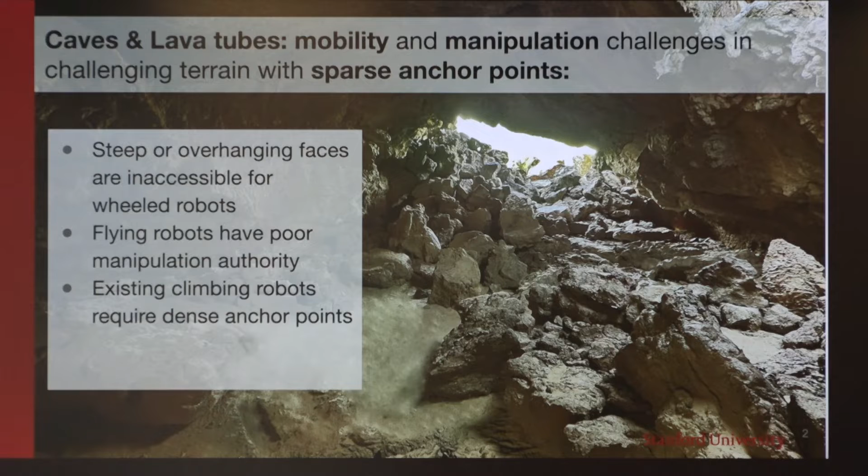The canonical solution - and it's interesting, I had dinner last night with Aaron Parness, who was one of the developers of the Lemur robots from JPL. Again, they're very impressive. They use microspines to cling on to surfaces.

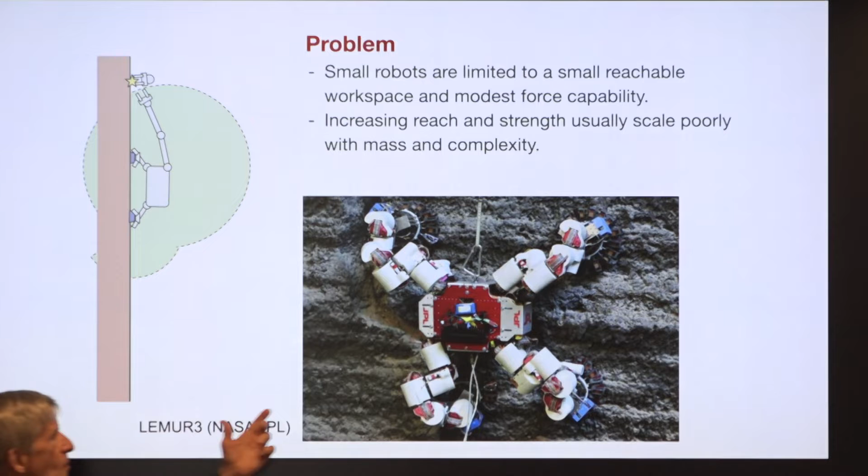This is a complicated robot, but it's also not very big, and therefore it can't move very far with one step. It does a tripedal crawl, keeping 3 legs on the surface at all times for safety, and then moves 1 leg at a time.

The workspace, the reach space of possible grasping sites, is just not that large. So it moves very slowly.

Large obstacles are big things to clamber over or try to get around. And it's always a little bit precarious.

So the thought was, what if you could have something that has sort of the compact form factor of a lemur, but can reach a really long way? And that was the idea behind ReachBot.

I have a little GIF here, which was prepared by Stephanie Newdick for her PhD defense, and I love it because it in a moment kind of captures the idea behind ReachBot.

So they were doing some science, drilling into the strata.

I think it concludes with taking a selfie. Yeah, but no, important optical sensing of the lava tube floor, right?

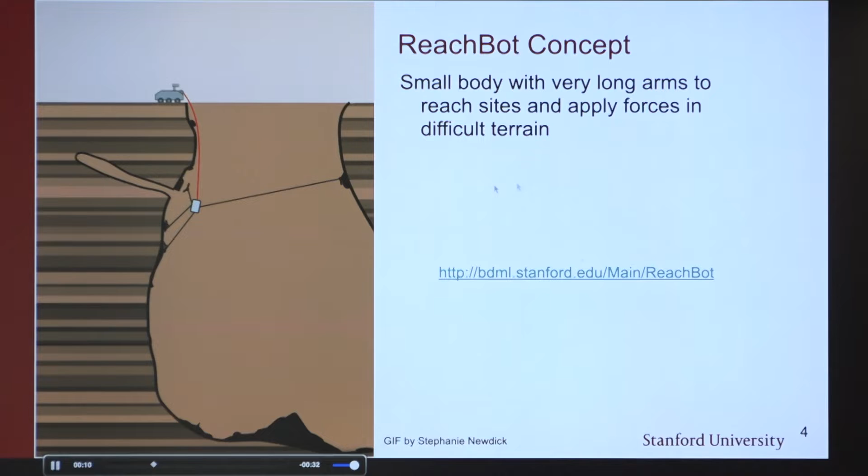The idea of having a small body with really long limbs, okay, here comes the retroactive bioinspiration part. Small body with really long limbs, I mean, it's a good idea. It's been around for millions of years.

These are harvestmen. They're not spiders, they're arachnids, but they have a small body, very long limbs, and this gives them the ability to navigate in very complex three-dimensional terrain.

But you may also have recognized that there's potentially a scaling problem here. The largest harvestmen are maybe about that big. You don't see any the size of a dog, or where the body would be the size of

a suitcase, and the limbs could be 20 or 30 feet long. And it's probably for us just as well, unless you like the spiders in Lord of the Rings, the cave spiders.

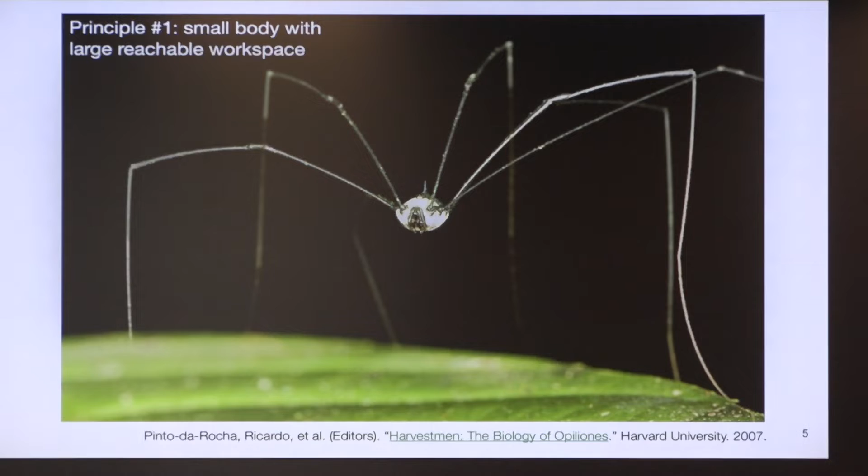So yeah, the problem, of course, is that mass goes as length cubed, beam strength goes as length squared. We're prone to buckling, and in fact, what you see these spider harvestmen do is in very windy, stormy weather,

they'll stretch out sprawled and load their legs mostly in tension because they're stronger that way. And that's a good trick.

Still, scaling's an issue. However, you might ask yourself, how big could this form factor get? Like if gravity was really not so much of a problem, and if I could start using stronger materials.

Are there any spider-like morphologies that go to several meters, maybe 10 meters in diameter? Yeah, if gravity's not a problem, the morphology can be successful. So there we go.

All right, so that's part of the idea behind ReachBot. The other part is an enabling technology. These are space booms. They're used for antennae in space or other space structures. They're carbon fiber, they're deployable, and they're quite strong.

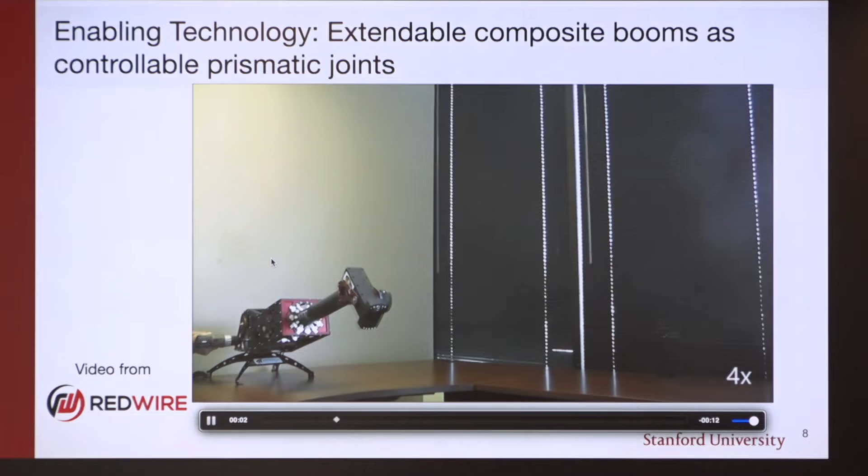And if you think about it, it's a nice solution, because what if you, unlike the harvestman spider with jointed legs, what if you said, well, what's the simplest possible structure I could have that would give me a really long leg? Well, you know, there's some appeal.

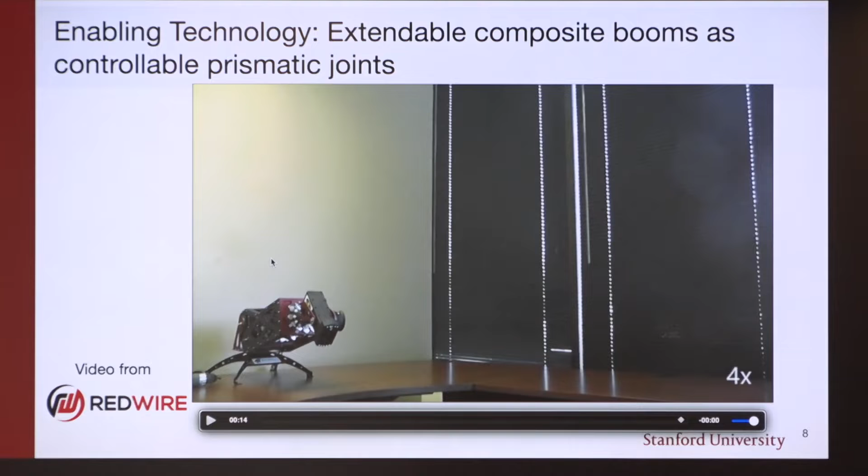Except for buckling, right? So if I make it out of a stronger material, I may be able to go pretty far, but I'll still have something which is probably stronger in tension than it is in compression or bending, but that's okay.

The second principle, the first principle is this idea of a small body with really long limbs, and in this case, we're using these deployable, unrolling space boom type structures.

The second is that we want, at the terminal ends, we want something that can grip and grip strongly. So here we're going back to the same kind of idea as in lemur, where we've got grippers with microspines, and we can pull with tens or even 100 newtons. And this is not entirely a new idea either.

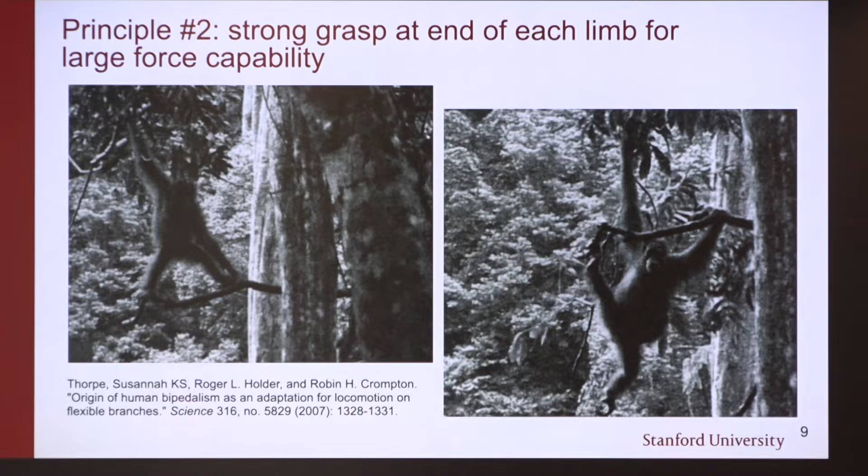If you can have several limbs and you don't distinguish too much what's an arm or a leg, and you have strong grasps at each terminal end, what's interesting is that in a difficult three-dimensional environment, this means that locomotion

becomes manipulation, where you manipulate yourself. And that's interesting, because that means that there's a whole big body of grasp theory which can be adapted to our purposes.

I've been working on hands and grasping for 30 years, I guess. The basic idea is you have several coordinated fingers pressing upon a body. You want to express what happens in terms of what the grasped object should do.

The fingers have constraints due to friction, and the fingers can push but they can't pull. We have the opposite problem: to a first approximation, we have very long beams that can pull but not push. Well, they can push a little bit, especially if they're not too long, but to a first approximation, instead of fingers that push, we have beams that pull. And the one part that's a little different is the details of the contact.

Instead of talking about friction cones and whether the finger can push without slipping, where the force vector has to be inside the friction cone, we now talk about having a spiny gripper. The gripper has some sort of limit surface of applicable forces and moments, and we try to make sure all the grasp forces stay inside all their limit surfaces. That's what I'll be talking about in the next few slides.

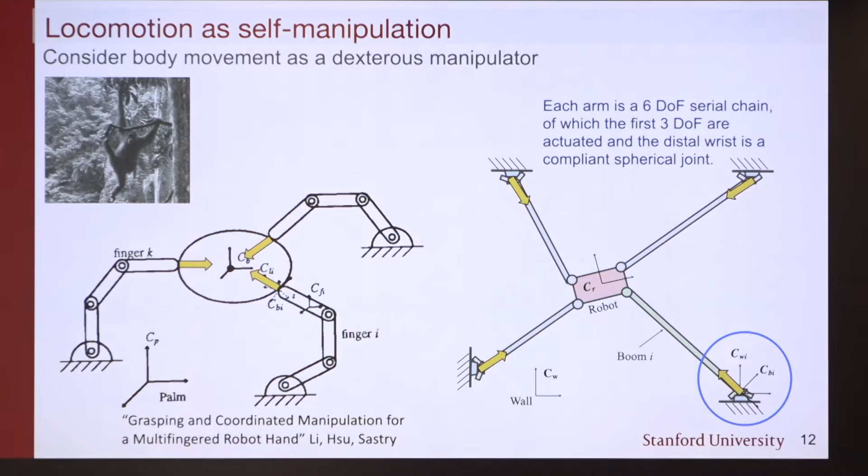Kinematically, each arm is a 6-axis chain. We have a 2-axis pan-tilt shoulder, a very long prismatic axis for the arm, and then a passive wrist. We're also looking at whether you could have an active wrist. Maybe, but we're really trying to minimize weight at the end of these booms, because when you have something going way out, like the tape measure, you really want what's out at the tip to be as light as possible so you can steer it to a likely grasp point.

And of course, our first prototypes were in fact these, mounted on a platform.

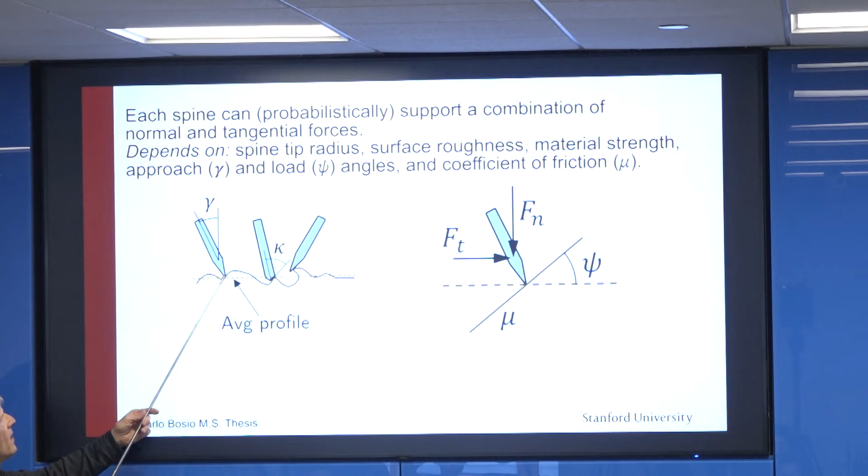So spines—we've done a lot of work over the years on spines. Many of our students at JPL and elsewhere have been looking at spines. The gist is that at the microscale, it's still friction. You've got a rough surface and a spine interacting with it, and depending upon the details of the contour right at that point, that determines in which directions I can exert force without it slipping or popping off.

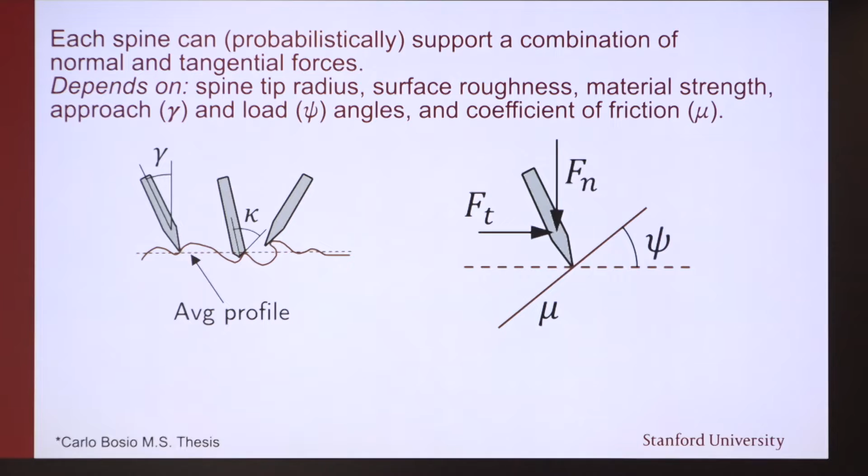For a collection of spines, I can talk about the probability that some aggregate set of spines will collectively be able to exert a certain force without slipping or popping off. So in the end, what we get is a probabilistic estimate for how much force an array of spines should be able to exert, depending on the roughness and the geometry of the surface.

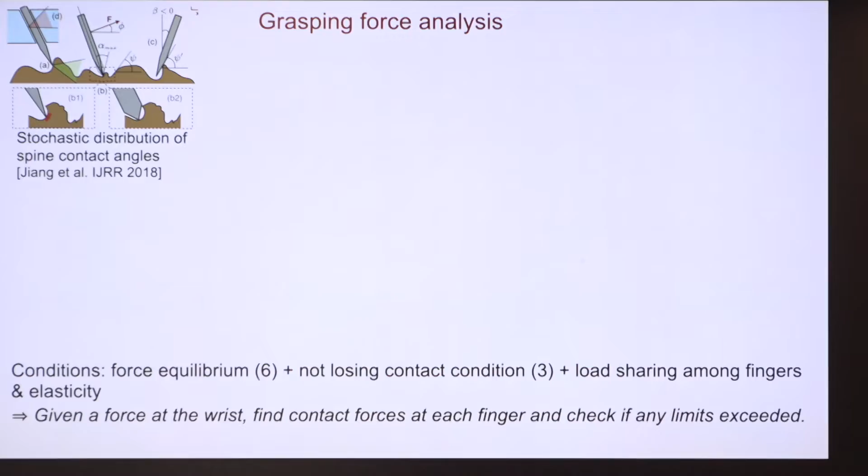And that is the beginning of our grasp force analysis. Here I'm talking about grasping at the level of one gripper at the end of one of these very long arms. So we have a stochastic distribution of spine contact angles, which depends on how rough the rock is and how sharp the spines are.

We like to use two things that work really well. One is suture needles. The other is Japanese microfishing hooks. I think it's wonderful that Japan, the country that developed bonsai, also has a hobby of microfishing. The fish hooks are really good, and we buy a lot of them and put them in our grippers.

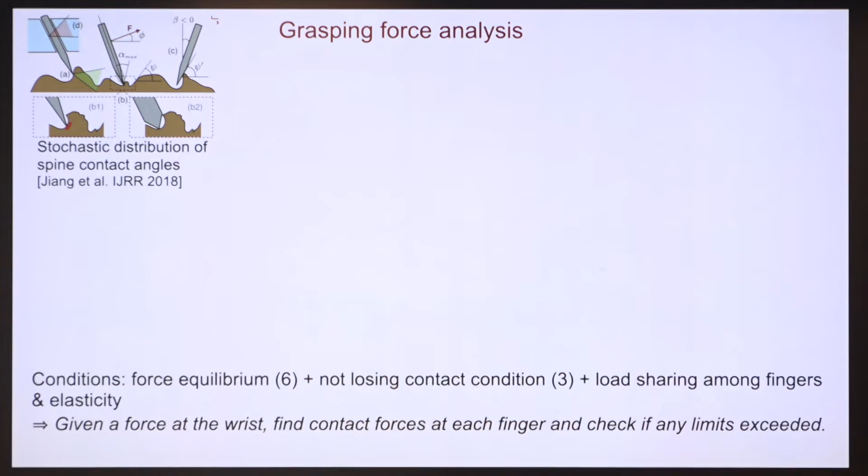So you do grasp analysis. We want to maintain force equilibrium. We also have some geometric constraints—we don't want any fingers to pop off the surface when we apply loads. And we want load sharing, meaning that when I apply a force to the whole gripper, that force should be shared among all three of the fingers.

What that means is I can do a grasp analysis and say, for a given force and moment, should this grasp be able to satisfy it? The answer is stochastic—there will be an expectation and a fairly big variation, because spine-surface contact is inherently probabilistic. I can tell you the estimated force, but it's just like the probability of rain tomorrow—there's variation associated with it, and that's something to keep in mind as I continue.

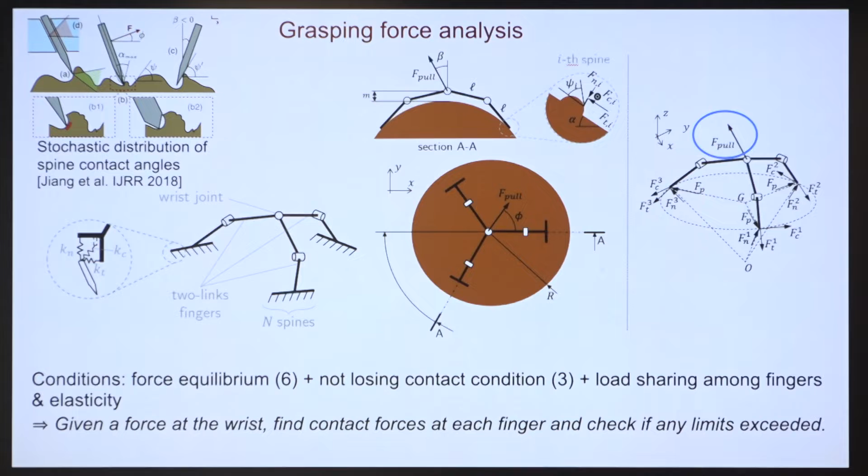So we get our estimated pull force.

And we then do a Monte Carlo simulation to build up a limit surface. So given a set of possible pull forces, and given what we know about the geometry of the surface we're grasping, and given what we know about how rough it is and how many spines we have, we can do this predicted limit surface.

And the results look like this. I thought I would point out one thing which is kind of interesting. Here we have a spine, an area where a spine is interacting with a bump on the surface. What's interesting is that if you have a gripper holding on a surface, this plot shows the ratio of pull force on the gripper to internal grasp force.

So if I'm grasping this bottle with a certain internal force, and you ask me, how hard can you pull it? Here, go ahead, we'll try it. You pull it out of my grasp. That's exactly the ratio we're plotting here, okay? So it's pull to internal force, as a function of grasping harder.

You can see that it really depends a lot on these angles, which again depend partly on how much I'm wrapping around like a surface on the rock and how rough it is. So what this tells you is that unlike our previous work where we had robots climbing more or less flat cement or cinder block walls, there's a big advantage if we scan the surface and say, aha, there is a little knob-like protrusion.

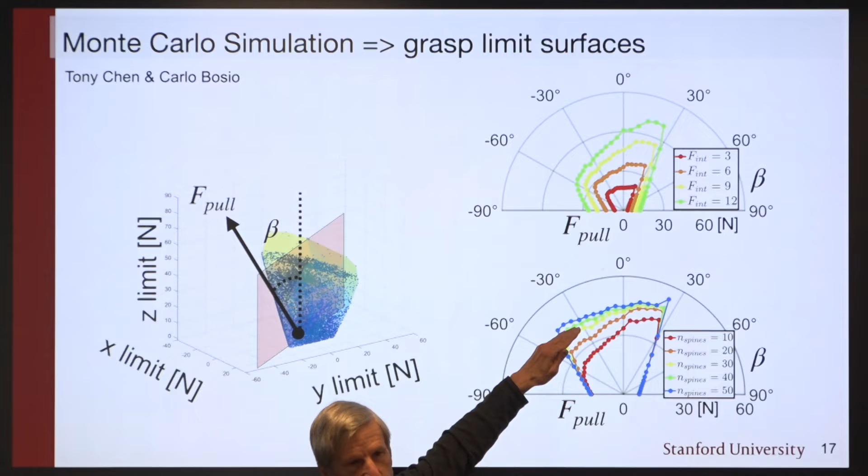All right, so here's Tony's gripper. He worked endlessly on this. It's an amazing piece of under-actuation.

Remember, we're trying to really minimize weight at the end of these long booms. So it's all one rather small motor, heavily geared down. There are tendons for actuating, and then there's a tendon for release.

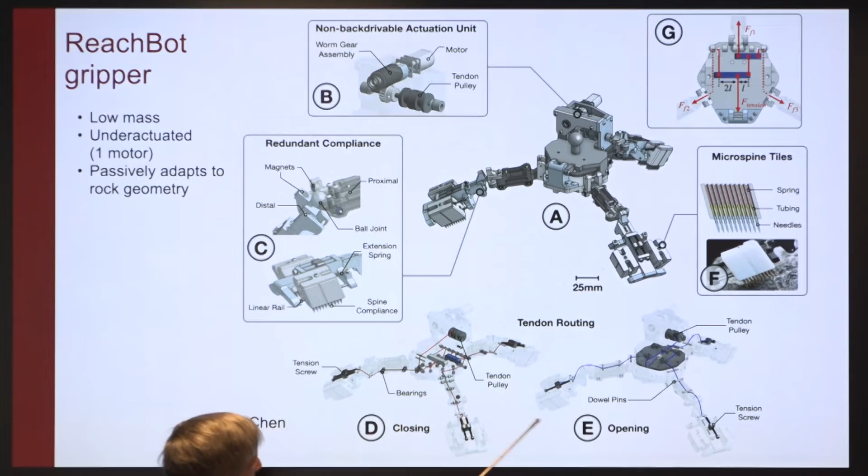Many degrees of freedom. We actually did a study - how many degrees of freedom do we really need along each finger, and where do they need to be - and found a combination that seemed to work best over these kind of protruding surfaces.

How many phalanges do we really need? Where do the joints really need to be? I wouldn't say it was a formal optimization, but this combination really did seem to work best. And if we take out 1 degree of freedom, it works noticeably less well in terms of how well it conforms to the surface.

And here we're using what are called spine tile arrays. This was actually the development of Hao Jiang, now at Flexiv. We found that this dense packing of spines, where each one of them is on a spring-loaded linear little - they're in a sleeve, in a hole - so they're actually very soft.

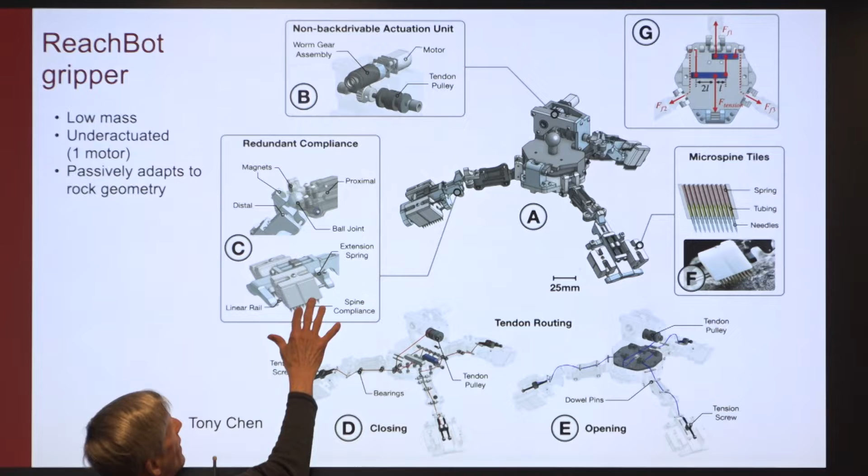I should have brought one in - if you touch it with your finger, it's so soft that it doesn't hurt. It's not perfect load sharing, but it kind of more than makes up for it in spine density. So there's our spine array, and there's our gripper, and it actually matched quite well with the limit surfaces that we had. So that's about as much as I wanted to say about gripping.

Let's talk a little more about some of the other parts of ReachBot. Another very important part is motion planning. This is mainly the work of Marco Pavone's students.

Given some knowledge of the environment you find yourself in and a set of possible grasp sites, you decompose the motion planning into 2 parts. First, we choose a grasp that will be stable and will allow us to resist disturbances.

Then we move the body while keeping the arms in place until we get to the end of our range of motion, at which point we detach a boom and put it somewhere else, and we continue. So that's the process.

Stephanie was the main person to do this motion planning, and there's now a new student, Dan Morton, who's taking over this work. So there you see this kind of slow motion. Actually, one of the nice things about space robots is that people do not mind if they are slow - would not work for manufacturing.

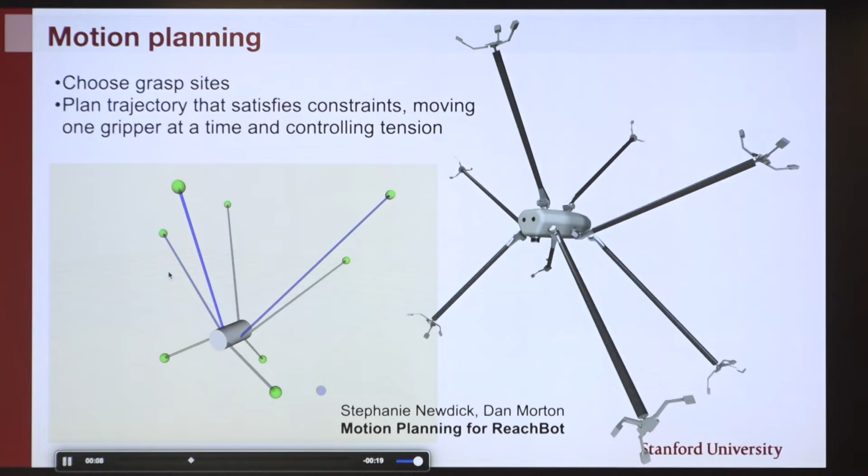So people have asked, are we doing dynamics in our motion planning? Well, no. The only time we have to worry about dynamics is if a gripper loses its grip suddenly, and they will do that sometimes because it is stochastic, no matter how well you predict things.

Even the rock could fail - you're gripping on a piece of rock and it just fractures. That sends a kind of shock wave through the system, and so we need to pick stances that are robust with respect to that, and that's part of what Stephanie's work is about.

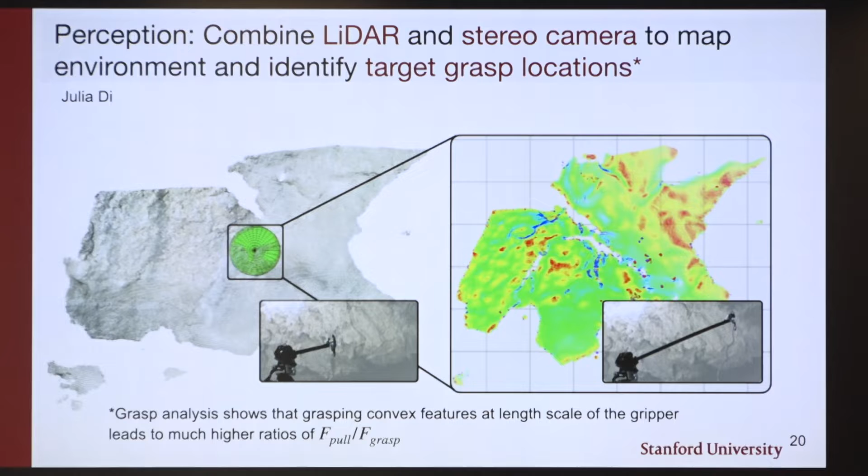Okay, and then somebody was asking about do we look for sites? Yes, so this is Julia's work, and it's a two-stage thing. We look from the body to find what we think might be a good site, and as we get close, we build a more detailed map of surface texture and geometry, looking for places that will give us a high ratio of pull force to grasp force.

As you get closer, you can actually look at the surface in fairly good detail. This is a real scan from a lava tube in the Mojave Desert, and that's a good promising looking feature.

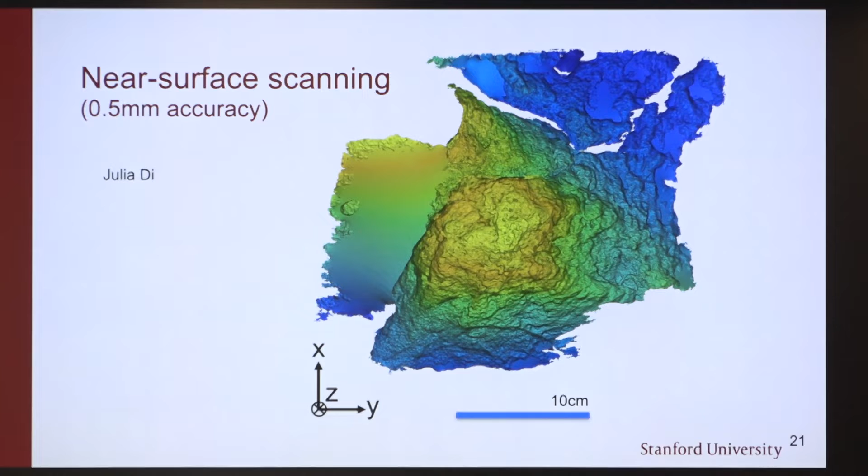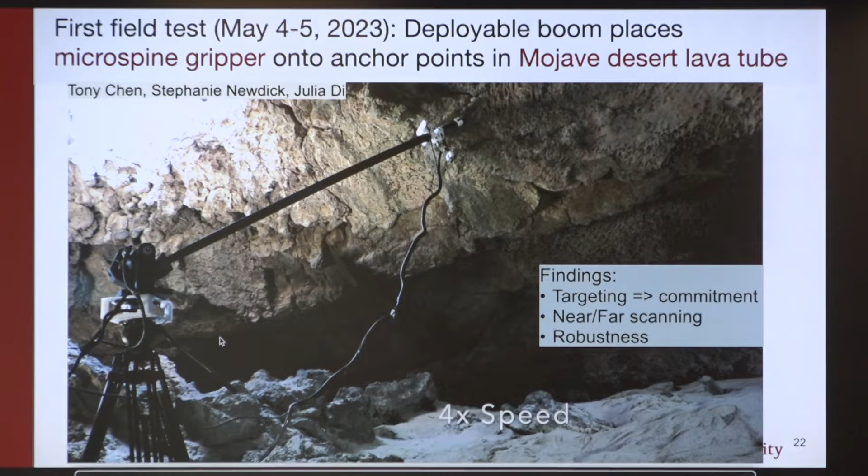Last May, Tony, Julia and Stephanie went on a field trip to the Mojave Desert, where there are many lava tubes. It was kind of outside the scope of our project to build a full ReachBot, but we could build one arm and mount it on a heavy surveyor's tripod. I'll let it run here as it finds a site and pulls. We're interested to see whether the actual maximum force we can exert matches our predictions based on what we know about the rock.

This stuff is coming out in a paper in Science Robotics soon, like any day now, I hope.

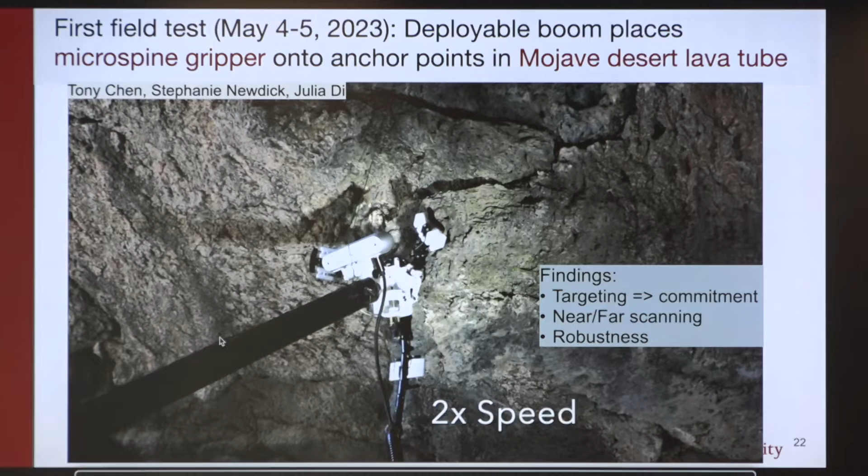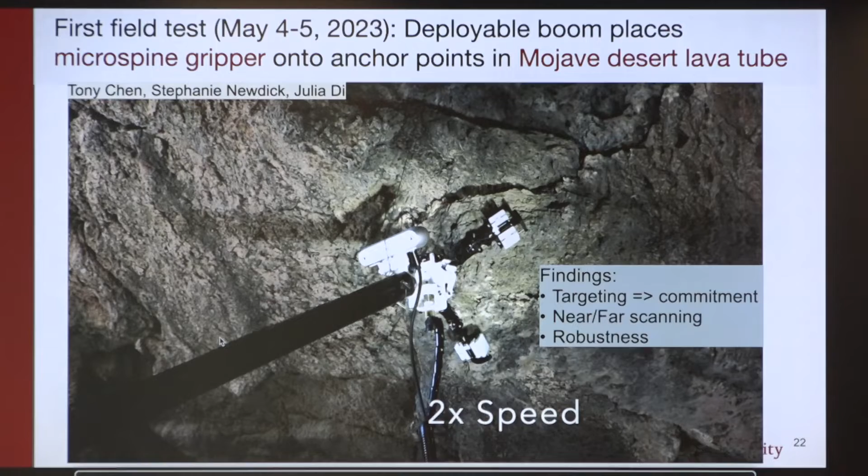This is the point I mentioned. Some of our findings from these field experiments are: targeting with ReachBot does involve a level of commitment — you really want to know you're going in a good direction before sending a boom out there. We found the need to do near and far scanning, and the third point is what we were talking about with robustness. You want to, at all times, be choosing stances that are robust with respect to disturbances.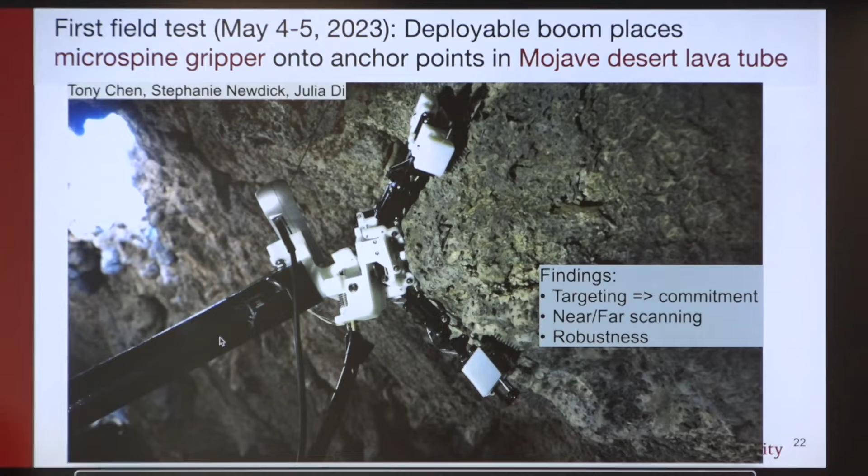Question: why is it a high commitment? Unlike a robot doing bin picking or grabbing things on a table, where if I grab and it drops or fails, it's no big deal — I'll go grab again. Here, by the time I've sent something out 20 feet, first it takes time to do that, but secondly, once I'm out there, my ability to steer and reposition isn't very good. It's kind of like that tape measure — better because it's a carbon fiber boom, but still not very good. A small error at my shoulder is a big error out at the tip, so what we usually have to do is retract and try again. So yeah, it's a time commitment, but it's still a commitment. Good question though, thanks.

A direct follow-on: have you played with plans that retract partially and rotate? No, and we should — I think it's an obvious thing to do. There's also this issue of how long the booms can really be without buckling, and how big they get in the rolled-up state. If you're really going to be in a cave or lava tube, is there any reason your booms ever need to be less than a meter long? Maybe not — maybe that's the minimum distance, and you go outward from there. Right now we can suck them all the way in, which I don't think is necessary unless you try to go through a very narrow passage. But yeah, it's a good point.

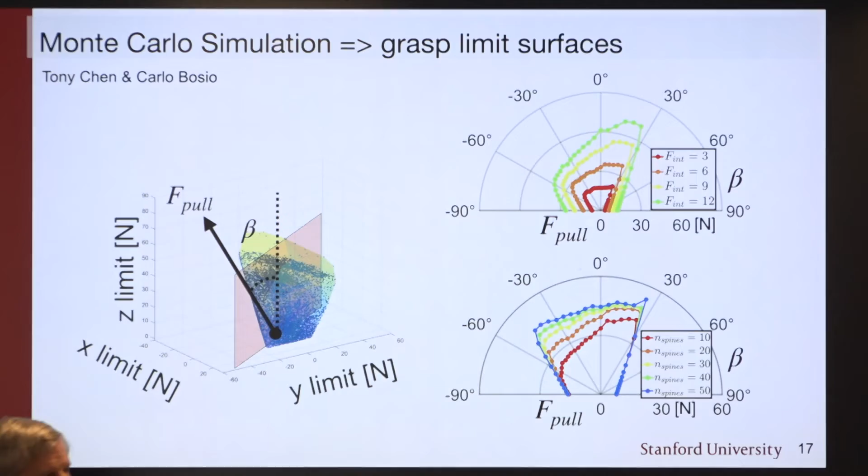Do you have any idea what percentage of a given cave or lava tube is navigable by this gripper? I don't have that data with me, but Julia and Stephanie - at least for the ones in the Mojave Desert, a lot of it. Finding good grasp sites was not a problem, there were lots of them. Whether that would be true on the Moon or Mars, we don't know.

All right, I'll move on.

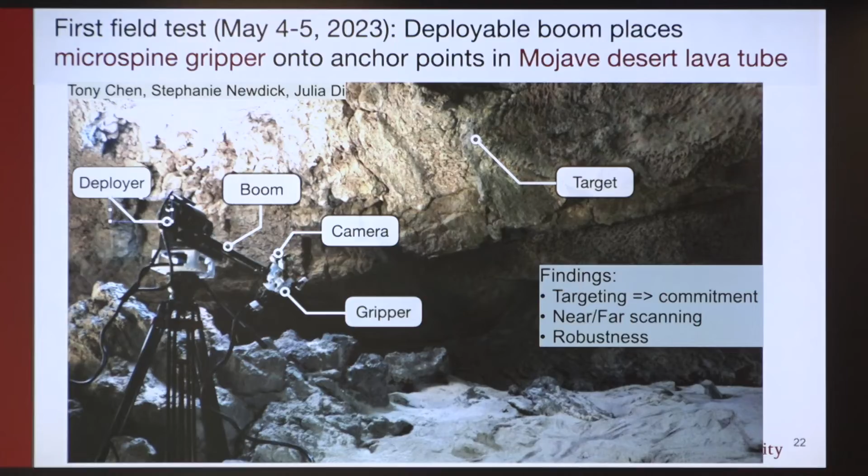So you saw us very slowly and painfully targeting sites in the Mojave Desert. I want to talk a little bit now about some new work. One of the things that struck us, and also frankly struck NASA, is that ReachBot as we're talking about it here is a somewhat expensive and complicated looking apparatus. Are there other applications for which you could do something simpler?

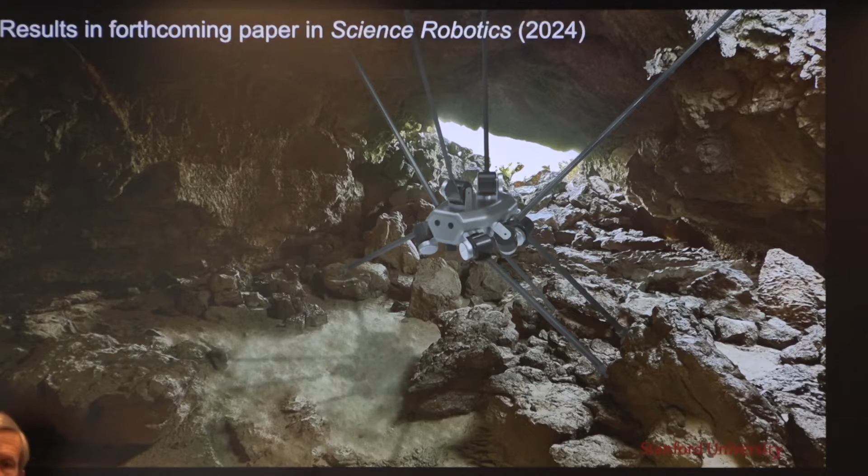What we know from doing this: if these beams can only pull, then to ensure stability and force closure, you need n+1 for n degrees of freedom, so therefore you need 7. And if you want to be able to reposition at least one at a time, you need 8. Is this why spiders have 8 legs? I don't know, but 8, that's a lot.

But that assumes that the booms can only pull - what we really get in terms of shoulder torques and the ability to do some compression, especially when the boom's not so long, we're kind of throwing that away. What's the minimum number of booms you could have? Well, how about 1? It's hard to imagine less than 1, or it's some completely different kind of robot.

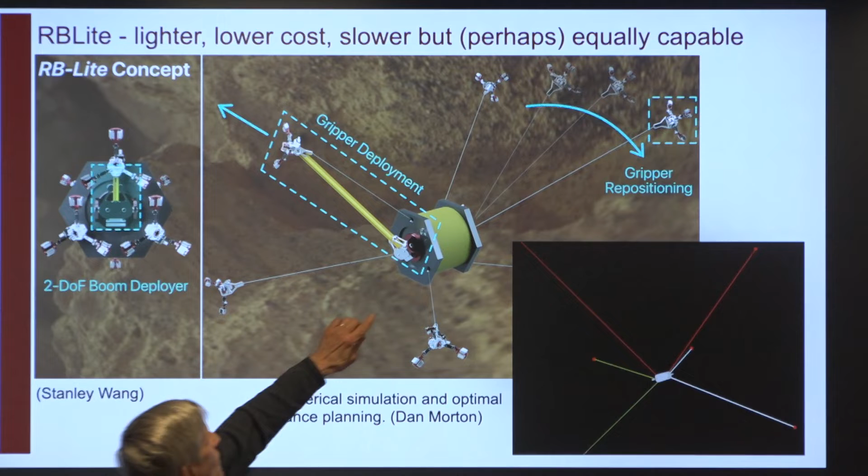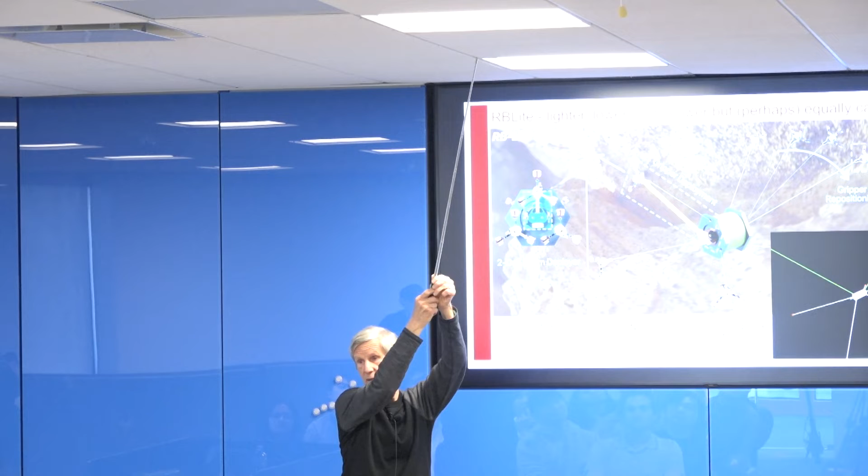So we've been sort of looking at that. Here's one where we actually have 2 booms - one you can see in the foreground and one hidden in the back. The idea is that these booms swivel around and latch onto a gripper, then extend with this gripper attached on the end, extend up to a grasp site, let the gripper grip, and then retract - but the gripper has a string on it, and the string is attached to a winch, so I can still apply tension.

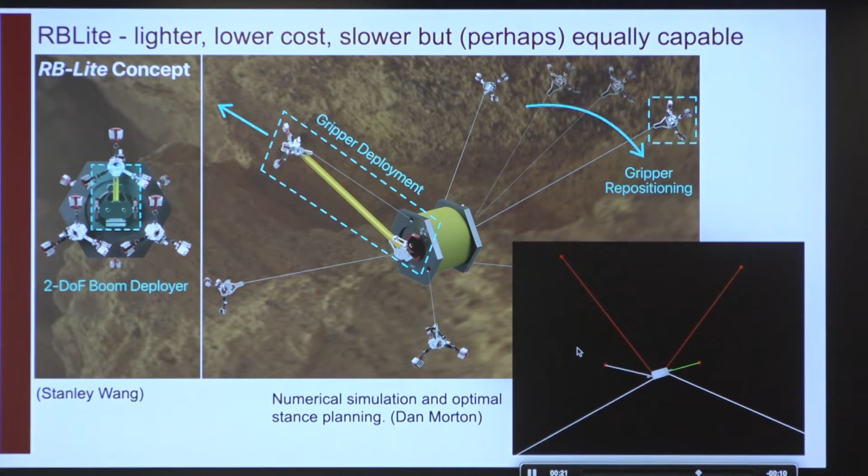And so that's the idea of what we're calling RBLite, and we've been doing simulations on it, and already getting some interesting findings - Dan Morton in particular, and Stanley Wang, a new student who's actually from Hannah Stuart's lab at Berkeley.

So one of the interesting findings of Dan Morton - have any of you been doing grasp stuff? How many people here know what the Ferrari-Canny metric is? A few of you, old timers mostly, and a few new timers. Good to see. It's the famous grasp theory metric. The gist of it is that you've got a bunch of fingers on an object.

Each finger can apply forces subject to friction, so within a friction cone. If I have a finger and I'm pushing, I can apply a force like this, and then it starts to slip, so I have a friction cone that limits the forces. If every finger can apply a force vector anywhere within its friction cone, you do a convex addition of all these forces, and you come up with a polytope or polyhedron in force space.

And the bigger the better. One way to do the metric is that you create a circle, a sphere, or better yet an ellipsoid, which corresponds to the forces and moments associated with the task. And you grow and grow and grow until at some point it intersects your polyhedron - that's the limit. That's essentially how we do limit surfaces.

So here's kind of an interesting result from Dan. The first thing is that when you have booms or cables that are mostly just applying tension, what we call the naive solution is not good at all - the sort of Spider-Man or Leonardo da Vinci Vitruvian Man thing. It's really bad because why?

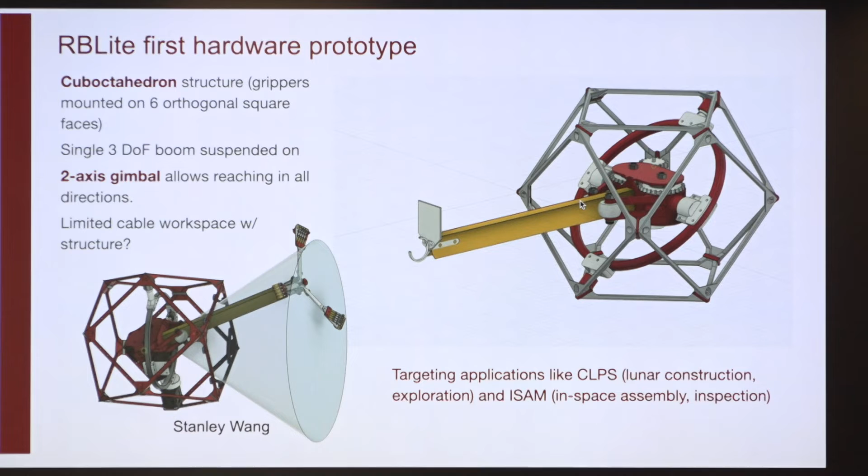So really minimalist, I think it's more of a thought experiment. I actually think that you would probably want to have at least 2 booms, but it is fun to watch.

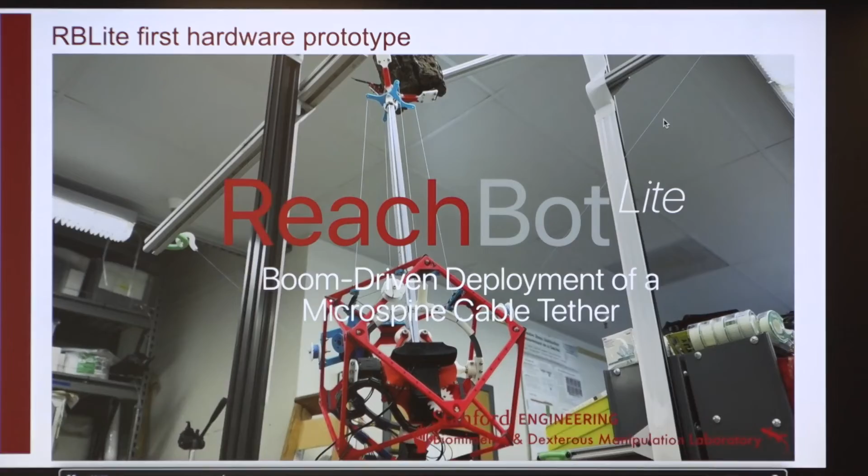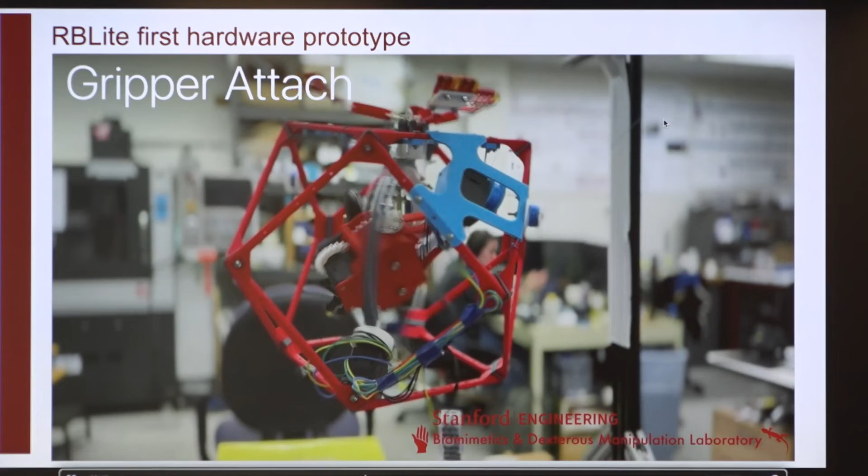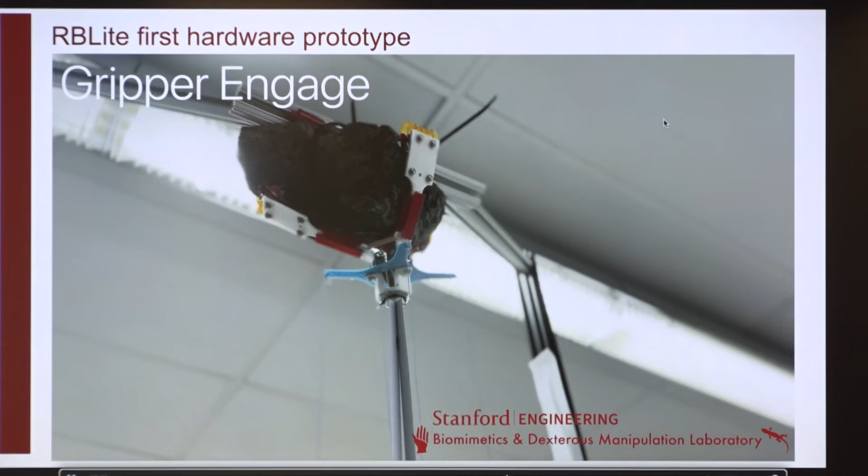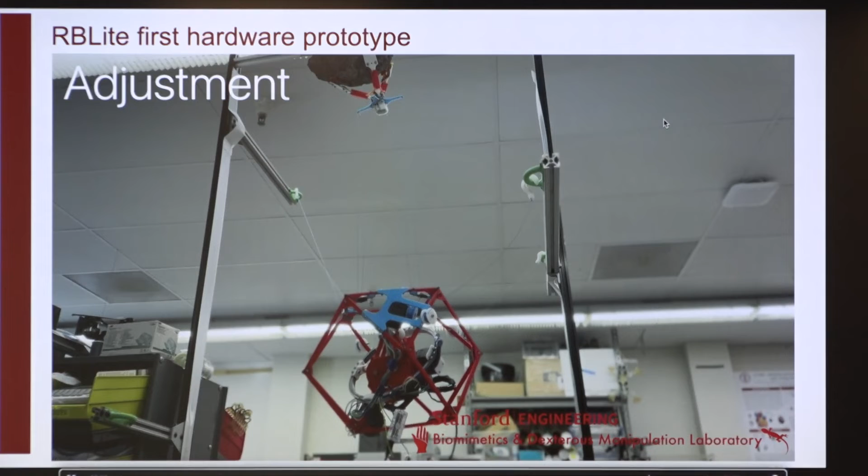So like everybody else, it's using Dynamixels and 3D printed parts, and literally these tape measures, 2 of them back to back. And it grabs. It detaches the gripper, but you can barely see it, but there's still a string attached that we can tension. And there, yes, in fact, it's hoisting itself up on the string.

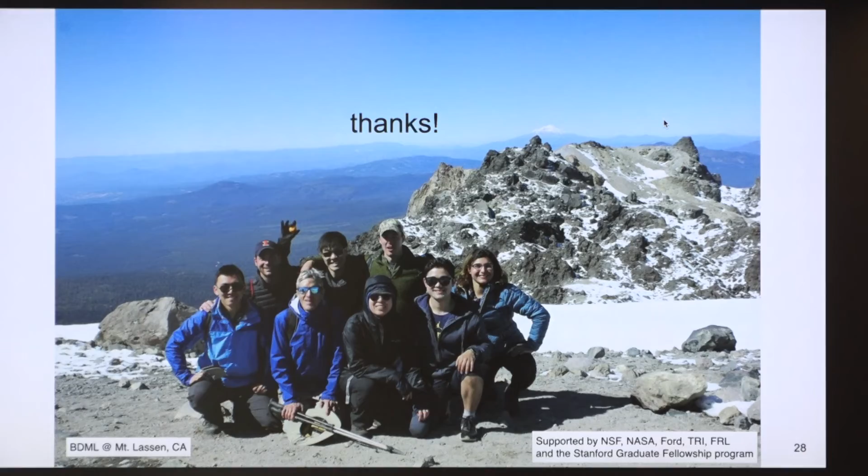Yes, please, in the back. Hi, yeah, sorry, I think first and next, second. So is there a situation where you see the cables being better than the booms? Are there situations where the cables are better than a boom?

Not really. I mean, the booms are really quite strong in tension, and unlike the cables, they're steerable, meaning that I can target a place and go to it. With the cable, I have to get it up there somehow. They're lighter, they're much simpler, I only need a winch. I don't need a pan tilt shoulder and then an extension apparatus. So from that point of view, they're nice because they let your whole package get smaller, more likely that we might get ourselves on a commercial landing program. But from the standpoint of grasping and functional performance, I don't actually think they have any advantages.

Yeah. Awesome presentation on that, thanks. I'm actually sort of got a follow-up to that one and then the original question.

On a follow-up to that, I wonder if in a more dynamic case, could the cables potentially have some benefit? I'm just picturing Tobey Maguire in a moon cave, swinging his way along. Swinging, yeah, well, yeah, you can imagine that. I mean, we're nowhere near that, we're moving very slowly. But from a stability point of view, they're actually worse.